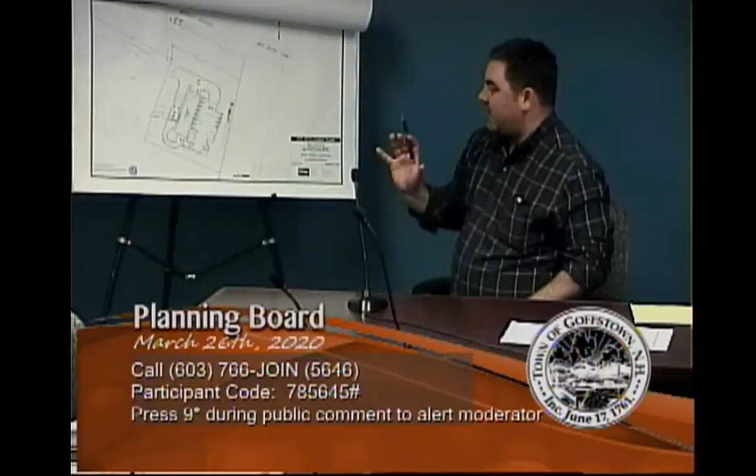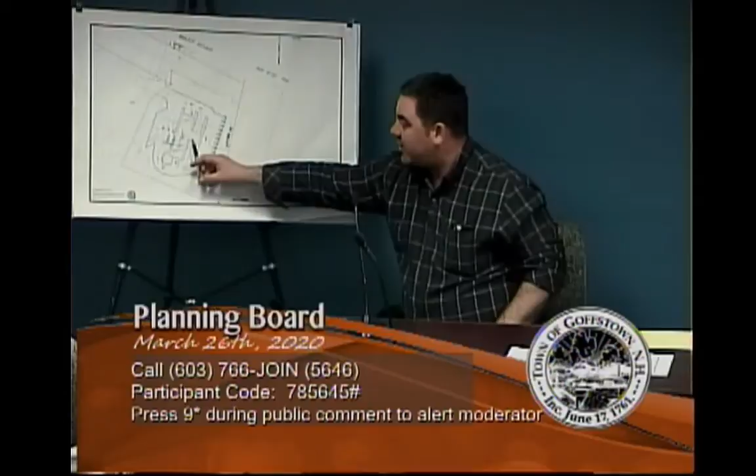This is where the Mike's Auto repair shop is. The only modification to the plan we're looking to make would be to add this 2-station manual service area, so instead of going through the automatic car wash, users would have the option to get out of their vehicle and do it themselves, by hand. There's no change in the proposed use, it's not even an accessory use, it's just an additional service they're looking to provide.

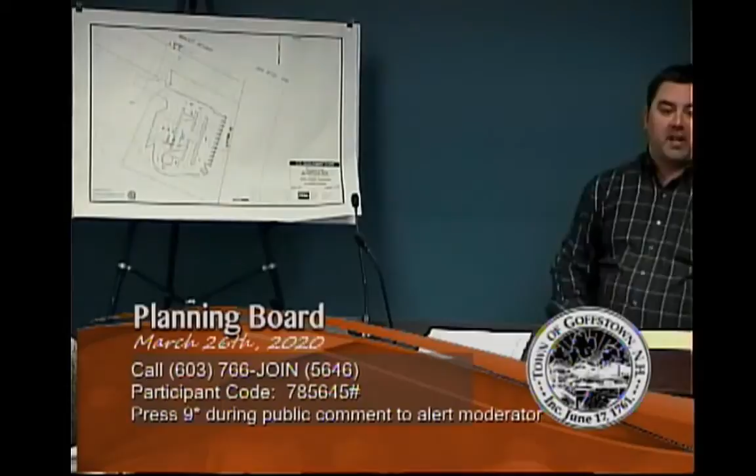Okay, and I have handouts, I can pass them. That's all right, we're not really here to approve a site plan, I just wanted to bring you up to speed on that.

So, briefly, to describe the zoning and vicinity of what we're looking to develop: this is a 13-acre parcel that's currently vacant. The interesting thing, which Joanne mentioned we're working through with Nancy, is that the rail trail currently exists as a strip of land between our site and the Mast Road.

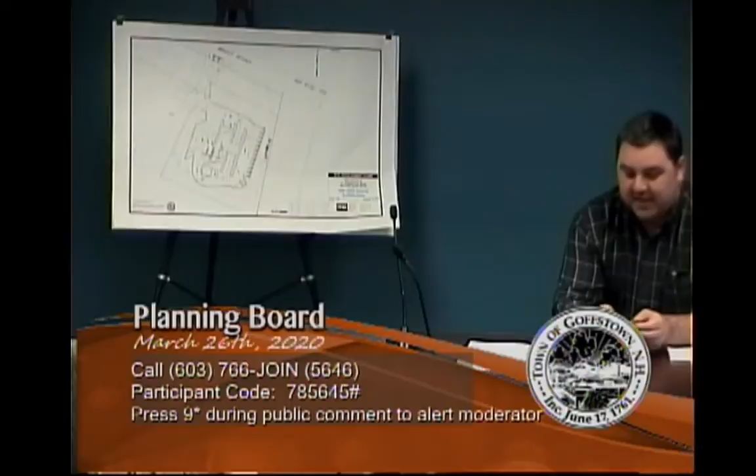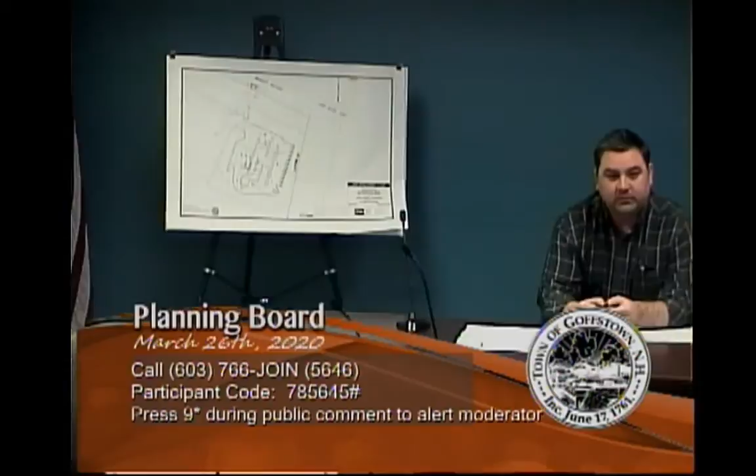That was originally, in doing our research, found to be deeded as an easement and conveyed as an easement in the 80s. Can I interrupt for a minute? Sure. If GTV has the ability to zoom in a little bit on that easel, because it's just a fuzzy thing at this point. Yeah, that's getting better, if they can go a little further. Yeah, that's much better, thank you.

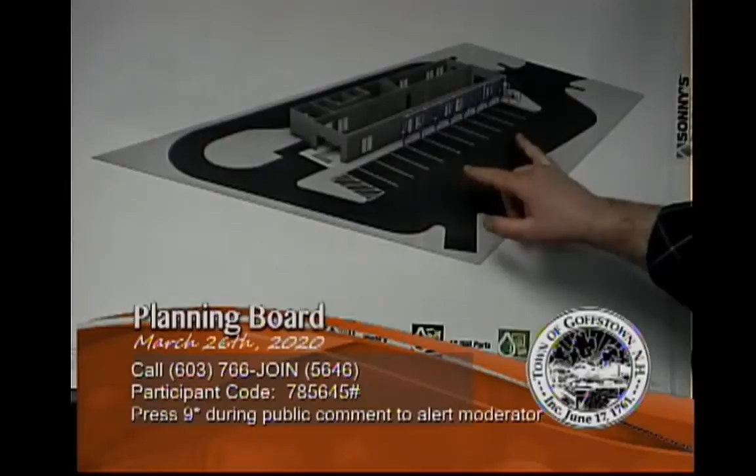This is some schematic information of a system we'd look to implement for the car wash itself, the tunnel system with vacuum boom stations, which I believe is at the Sunoco station, right down the Shell station down the street. So we anticipate something like this with manual service, with 2 manual service bays.

In terms of the site itself, since it's too large to just have a small commercial pad site for this car wash, we'd be subdividing it, and the remaining acreage would be sold. So this would involve a subdivision as well. Roughly this would be approximately a 2-acre site, probably a little smaller than 2 acres.

The facility is comprised of just the car wash station, with very few employees. We do have some traffic, although unless you have a real warm winter's day or something, we don't anticipate the traffic will be significant from this development.

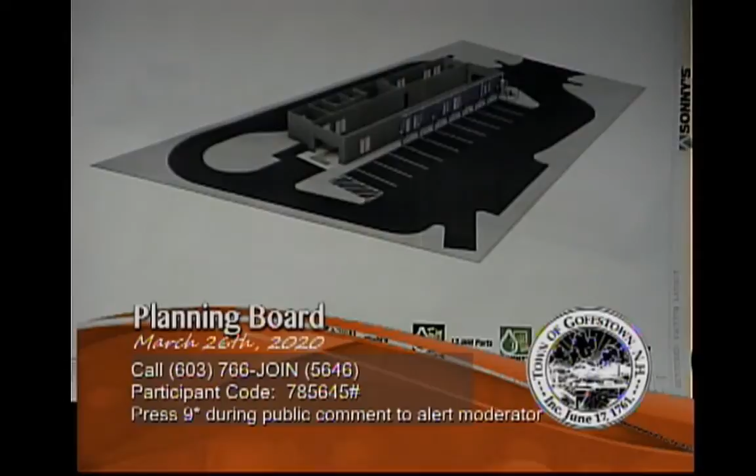The road in front of the site is just a 2-lane highway, one way west, one way eastbound, so we don't anticipate at this point any mitigation requirements for traffic, but we need to do a scoping session with the DOT, and we'll be doing a traffic study before we come to the planning board to address any traffic conditions.

At this point we've had a preliminary meeting with the DOT regarding this use in a similar location in Goffstown, and there was a consensus that there was not a huge concern about peak generation and traffic creating a lot of issues, although we know the highway's pretty busy, particularly in the PM weekday condition.

We feel the busiest days would be like a warm winter day when everyone's out washing their vehicles. This will process - I don't believe... I can provide information on the throughput capacity, but that's for a different discussion.

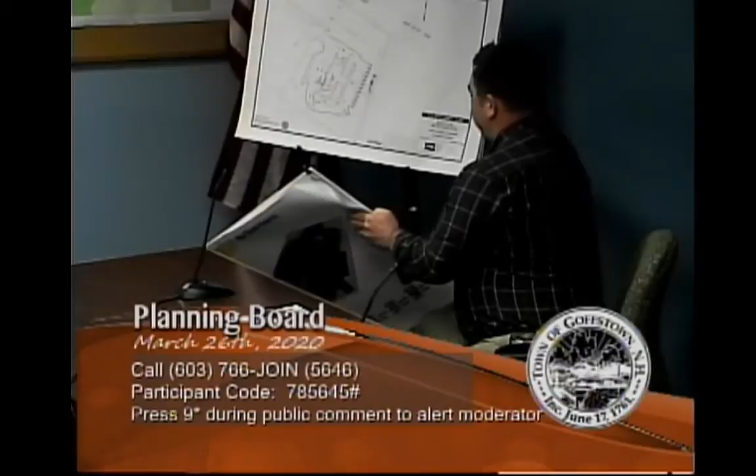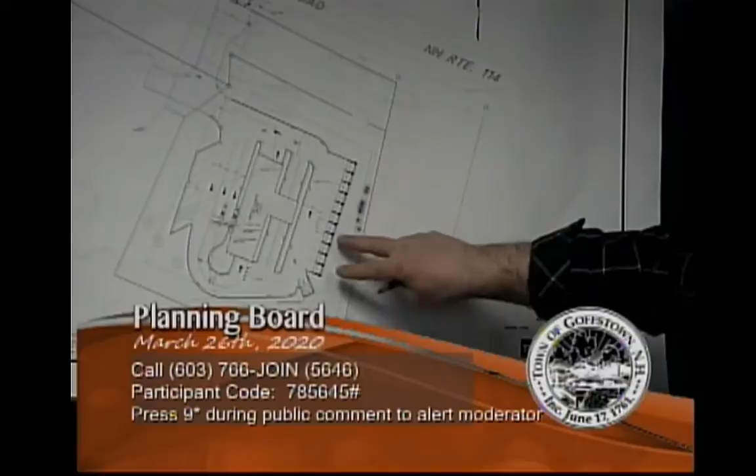We have plenty of queuing and circulation on our site plan because we can control the site since we have 13 acres to work with. It's allowed us to set the property back from Mast Road a great distance, 100 feet. We have adequate buffering, more than the minimum of 10 feet, providing 25 feet on the side buffer, and nothing required to the back. So this is set away from the abutting uses more than what would be minimally required.

Is the abutter aware of this application? Have you spoken with the abutter? We have not, I have. Okay, I just wondered, because this is not a noticed hearing, so I've requested that I urge them to watch this evening, the abutter he's speaking of. We haven't spoken with either Mike's Auto or the opposing properties, which would be the salon and another auto business. Right, which uses would all be noticed when we have our hearings.

So other things like drainage, we're going to do test pitting and figure that out. But what we're talking about is locating a car wash in a section of Mast Road where there's already a car wash less than a mile away, and there are car dealerships and businesses across the street.

It's consistent with the surrounding neighborhood in terms of general usage patterns, so it shouldn't alter the essential character of the area. I think it'll obviously be good because it'll benefit by bringing another commercial property, and we know about the desire for the town to maximize its use of commercial property. This is a good use. It'll generate taxable revenue, it's not going to load the schools, and it'll pay any impact fees towards the development. It's a good use.

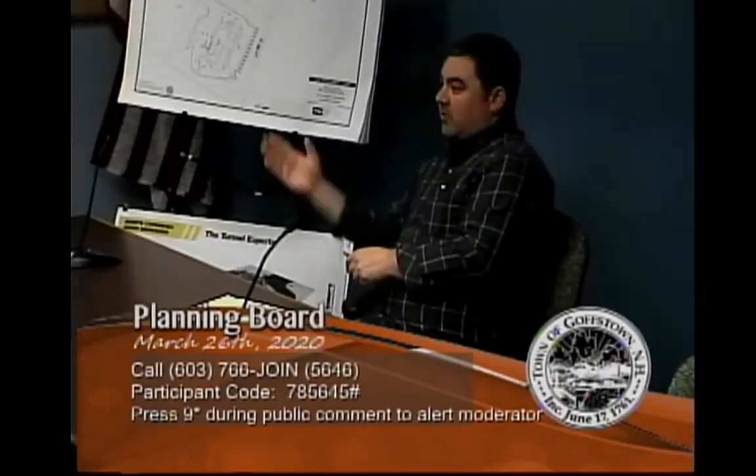The remaining property would still have access via this easement. So if there was a future subdivision, we would need to create further easements, unless we wanted to negotiate an easement with the town to cross the rail trail again, which I would think the town would want to minimize the amount of crossings.

That's a good point - we're talking about state highway crossings. Two entrances off State Highway on the same parcel might have difficulty at DOT. So right now, the plan would be to create a shared driveway for these two parcels.

Assuming that the frontage issue gets resolved, what comments might planning board members have in regards to the access and the rail trail? David, for access. Jason,

Once you cross the rail corridor, you show a T intersection. Did you consider a straight-through intersection to service the rest of the parcel for future development?

Yeah, we have looked at that. However, this area is planned on being used for a drainage facility, so there would be a drainage pond in this area. As we go through the planning phase, I could fine tune that and see if it's a better design to go with - at least allow for a T or a four-way cross intersection, and not only limit people to having to turn right. So I could basically have the ability to go this way and this way on that future parcel.

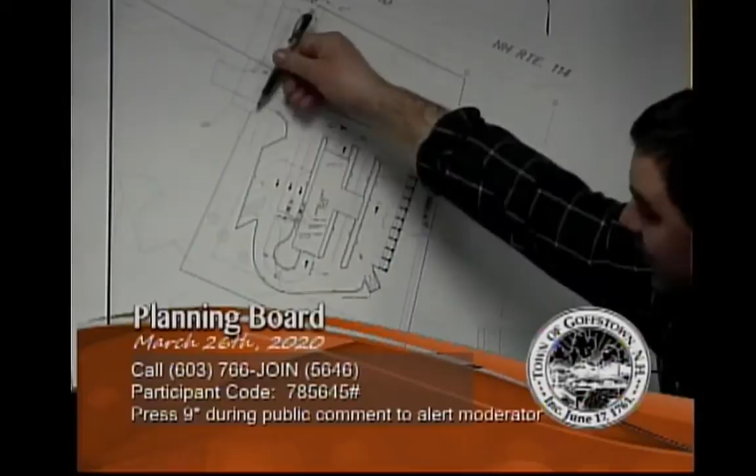We can look at that. Okay, David, as to the issues with the access and the easement?

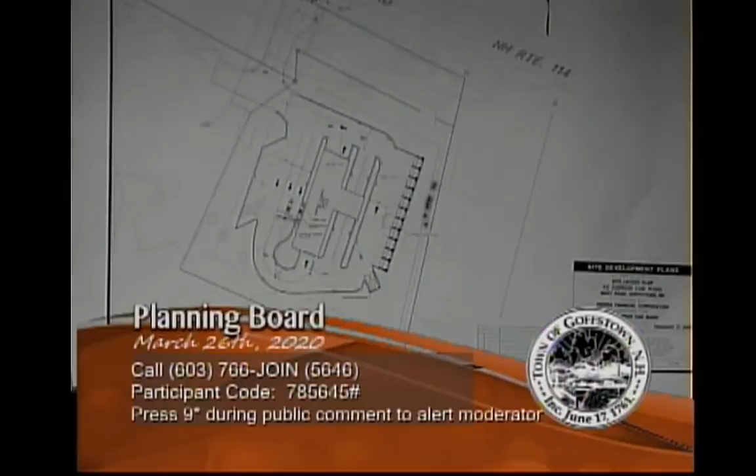I have a lot of knowledge on that particular area, and one thing I have is there's an unkept growth of trees and bushes that are on town land that effectively shield this property from Mast Road, except for what your driveway entrance would be.

Yeah, they're located all through there. And you know that there could be some consideration, if developing that parcel, if you wanted to do some landscaping, you need to talk to the parks department about the right of way.

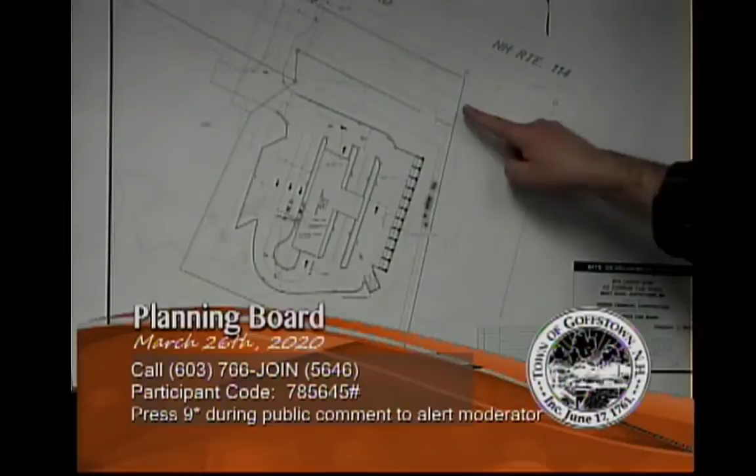I have one planning comment that I'd like Jason to know about. On the east boundary of this one acre parcel, you show some bushes sketched in there. Much of that boundary line has a man-made berm on the west side of the boundary line, and that berm serves to keep water from flowing over the boundary line.

Yeah, there's a shallow area - the contour line shows this. I'm aware of a considerable amount of water flowing off the upper elevations to the rear of this parcel and flowing through the parcel, getting to various culverts that are on the rail trail area. So I just want to draw your attention that there's considerable stormwater flow that should be examined carefully.

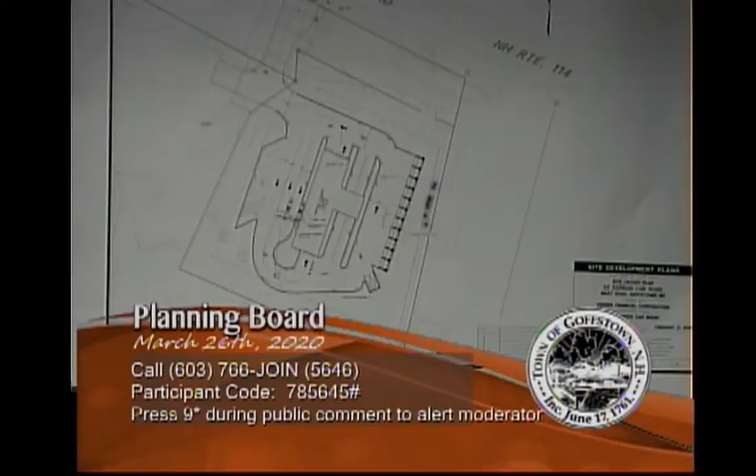I think that encompasses the planning board's consideration of comments to go to the ZBA. Does any other planning board member have any comment on anything so far? No comment. No? Okay, all right.

Can any board members recall whether we actually do a motion on this, or do we just have an understanding and Gail will do a memo to herself? I can do a memo. Joanne, do you recall whether we actually took a vote on this the last time, or did we just send it over? Yes, the last few times you took a vote, and then I sent a memo to the ZBA.

I'll make a motion that we have no comment to the ZBA as to the access, and that the use we see is appropriate. Second. That's been seconded by Phil. Is there any further discussion? Seeing none.

Pete? Yes. David? I agree. Gail? Yes. Kimberly? Yes. Phil? Yes, I vote yes. Thank you very much, thank you folks for your time, appreciate that.

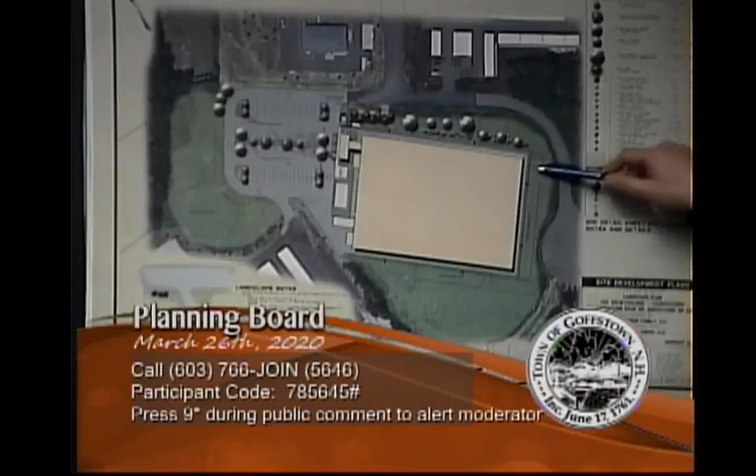Okay, Peter, Barbara, should we amend that to say specifically where those trees are being eliminated from? Is that necessary? I don't know that we control the specifics of where. I think it was more for a screen, Nick was saying that the most likely screening point would be there. I mean, we can say as presented in the plan. As presented in the plan is probably the easiest way, because there's two components: there's the number of trees, and they're supposed to be separated at a certain distance. The reason I point out that area is because that's where they're not provided along that length. If we were to continue them at 40-foot spacing, then it would meet the requirements, but we're asking not to provide them there for the reasons given.

Thank you, Peter, so we'll take that as an amendment. Any further discussion on the waiver request for the trees? All right, seeing none, I'm gonna call for a vote. Peter? Yes. David? Yes. Gail? Yes. Kimberly? Yes. Phil? Yes. I vote yes. The waiver is granted.

The next request in regards to this matter is a conditional use permit for our regs in regards to table 4.3, maximum building footprint greater than 50,000 square foot. The applicant has graciously gone through the criteria for us during the course of the meeting. Is there a motion?

I'll make the motion that we grant the 80,500 square foot and the ability to put in the soccer field, making the findings as the applicant has requested in regards to the conditional use permit.

Is there a second? I'll second it. Phil, we'll take Phil.

Is there any further discussion on the motion? Seeing none, all those in favor. It's a roll call, so vote yes or no. Peter, yes. David, yes. Gail, yes. Kimberly, yes. Phil, yes. I vote yes. The conditional use permit in regards to the footprint is granted.

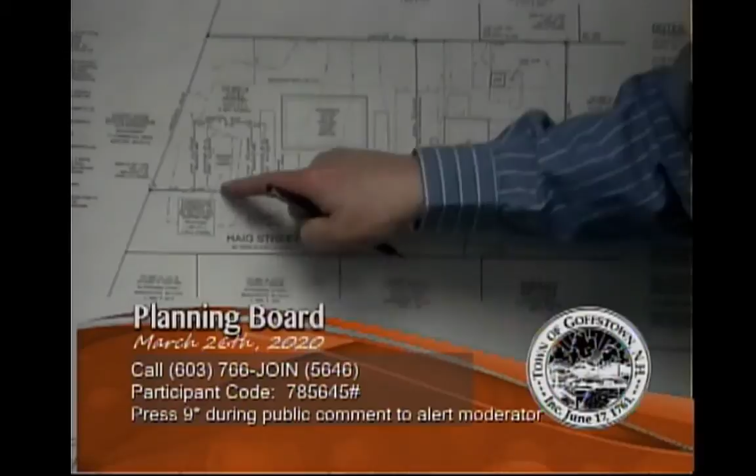I just wanted to clarify we're not really redoing the turnaround. The existing turnaround sits in here - that's the paved turnaround that exists. This dotted line is the existing easement. On the west end, the pavement actually goes over the limits of the easement.

Because we were here, we figured it would make sense to locate the easement so it's centered on the pavement. I think that was the original intent, that they wanted the thumb of the turnaround to be inside the easement. When it got built, it just didn't get built that way. So now we're proposing to move the easement so it's centered on the thumb, which I think would have been the initial proposal. If the select board doesn't want to move that, that's fine, we can leave it where it is. We just thought it would clean it up and center that, so that's why we're proposing it.

As part of this, we're going to have a sewer main extension. There will be 2 new sewer manholes installed for the extension. In addition, the applicant is going to pay to replace the existing manhole at the end of the line, which is in poor condition, and DPW has asked to have it replaced.

The lots themselves are fairly straightforward. We're not asking for any waivers related to zoning - the lot complies with all the zoning ordinance. We are asking for 3 waivers, as Joanne mentioned.

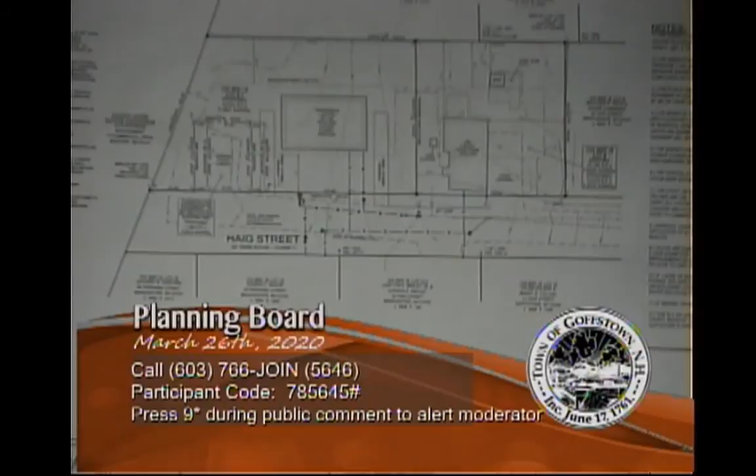Okay, well, so I guess I'm confused. Do you want us to grant the change in the easement, or do you want to wait and see what the ZBA does? We thought changing the easement was a good housekeeping method now. Yeah, we just didn't do it for the driveway. One of the few times in life where we did something that worked, whatever.

An honest applicant. So for condition number 7, I would recommend changing it to say legal counsel shall review submittal of recordable easement for the easement relocation, if it's to be.

All right, but Joanne, in regards to the conditions, some of these relate to the variance that we are not dealing with now, because now we have a straight subdivision. So if I go through your comments, I don't think we need condition 8 anymore.

And do we need condition 4? Because we're not approving a building. I mean, I guess we do, but I think 8 clearly comes out. If they decide that if the variance is not approved, then they would be building a building and they don't need to come back to you.

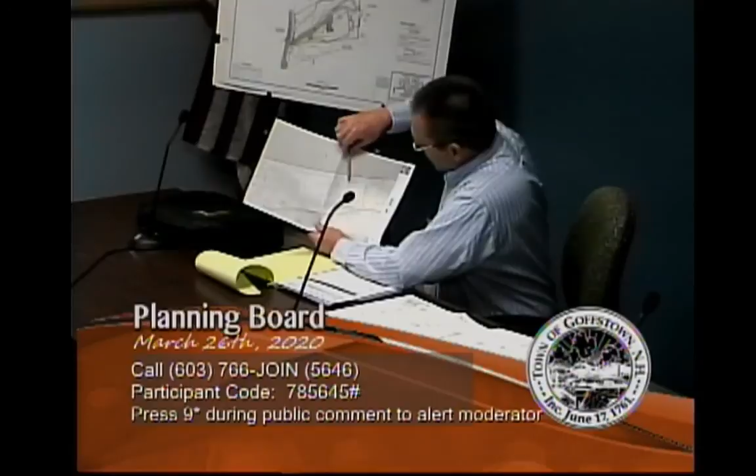If you have a tax map here, you'll see this large piece — this is their existing house. What they're proposing is, once he gets the barn and driveway in and starts the barn, they'll put the existing house on the market, and he will come in with a lot line adjustment plan to correct the driveway parcel, taking this property and adding it to the smaller lot. So we'll take care of that driveway problem at a later date.

Why aren't we taking care of it now?

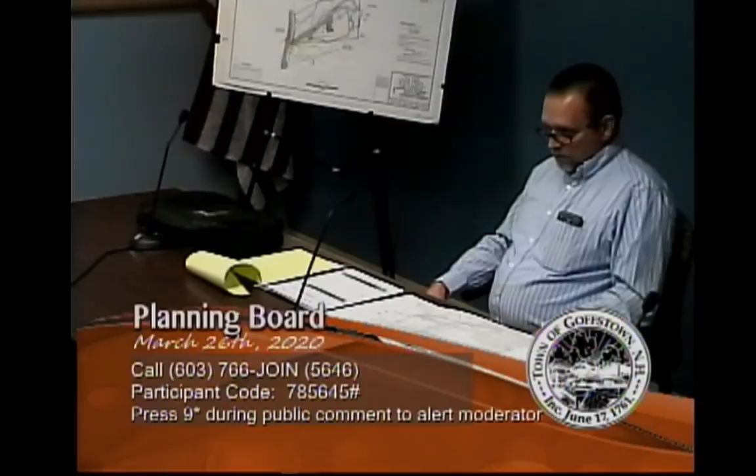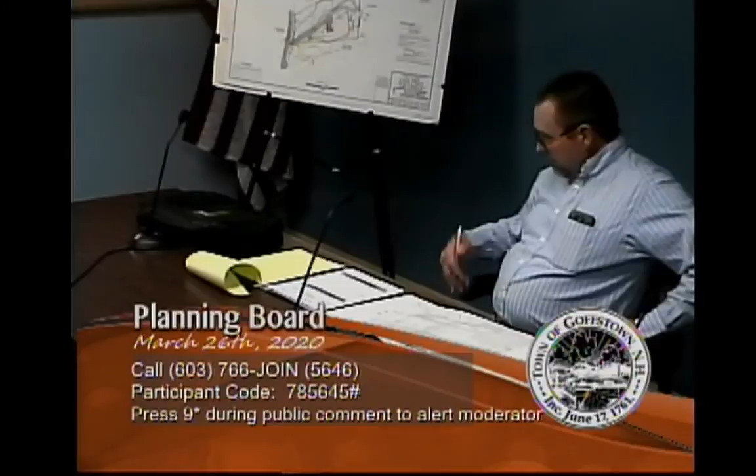But we could give it an easement, if that's required. I don't think you can give an easement to yourself. It would have to be after the property is sold. Well, it's not called an easement. What is it called? I don't have Jim here, but there's something they can do because they're different lots, so even though they're different lots, the same signatories can do it. Yes. And then at the time he comes in to do the lot line adjustment, if he still wants to do that, the easement will be extinguished along with the lot line adjustment.

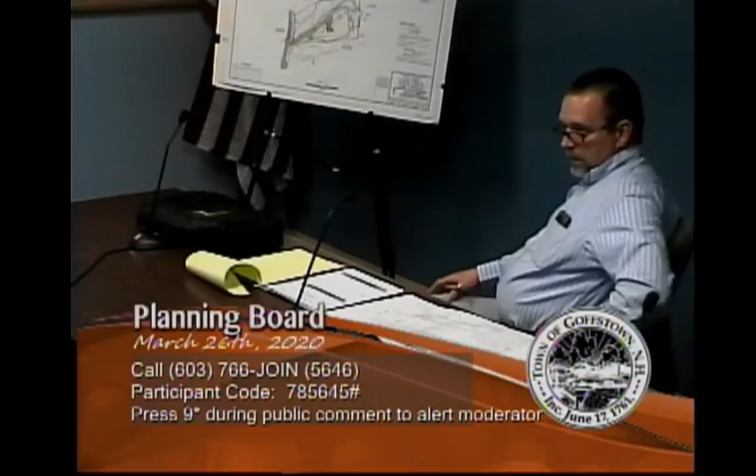Can you explain again what that green is that runs along the property line there? Along the abutting lot line, what is that? Oh, that's the tree line. There's an existing tree line here, yes, that's what the green is.

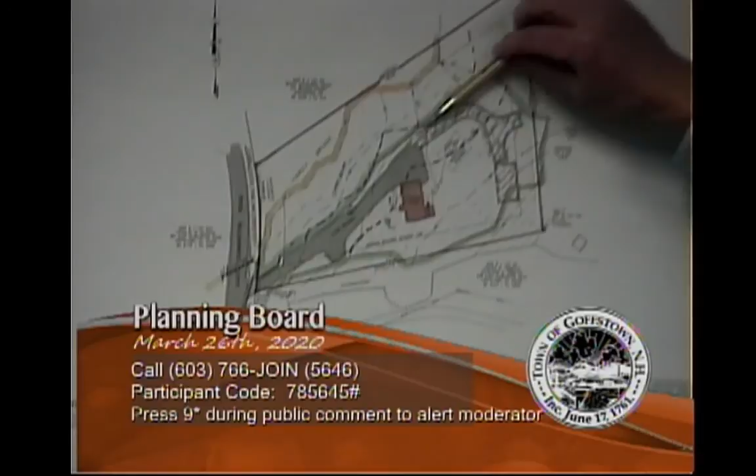All right, thank you. So Sarah, that was your comment? Yeah, we also wondered if it would be possible to do a little erosion control just along the portion of the new gravel area, or just be mindful of the portion of the gravel area that is closest, during construction until it's stabilized. So Joanne has proposed that as a condition, to provide erosion control along the northern edge of the proposed driveway extension during construction.

And I believe their other comment was about a permit for a driveway modification. Yes, the driveway modification permit is free, available from DPW, and I believe there's a fillable version available online, so you could even get started soon and not have to go anywhere.

All right, board member questions or comments? Kimberly, do you have anything? No, I have no questions or comments. I was actually just looking up the site on Google Earth, and the existing gravel driveway just skirts that 50-foot outer buffer line, and the rest of it's lawn, and as long as it stays gravel... I mean, gravel is actually impervious, so let's not pretend it's not, but it's not a paved driveway that's going to be on a lawn as it is now. So I don't have any problems with it, with giving them the relief of the outer 50-foot buffer.

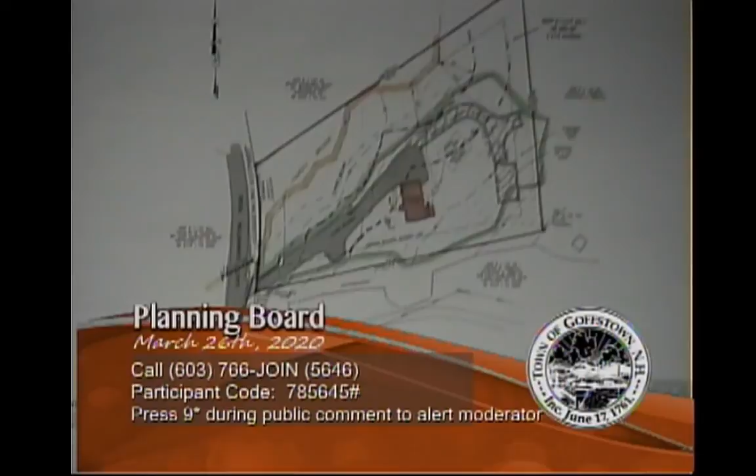My concern would be procedurally, we tend not to step over the Conservation Commission's toes. Well, I understand that. There are a couple of ways we can handle it. I think procedurally we could approve it subject to conservation approval, or we could continue this for approval to the next meeting after the Conservation Commission meeting. I certainly think there are a couple of ways we could handle it.

I don't see this as a major intrusion on the outer 50-foot, and as Kimberly says, it's gravel, so I'm not as concerned about this request as I might be for others. I also know that people were very anxious to get going on projects this spring, and that has been dampened a little bit by the moisture we got this week. So, I don't know, board, how do you propose?

Peter? I would think we would go with the first option you gave, approving it, to the point where we go to conservation, approve it with their consent after they've reviewed it. Other board members, your opinion? Kimberly, what do you think of that? I think that's fine. I don't know that they would have anything other than what we've suggested, which would be good erosion control. I just feel like out of respect we need to give them that option to weigh in, so I like that option.